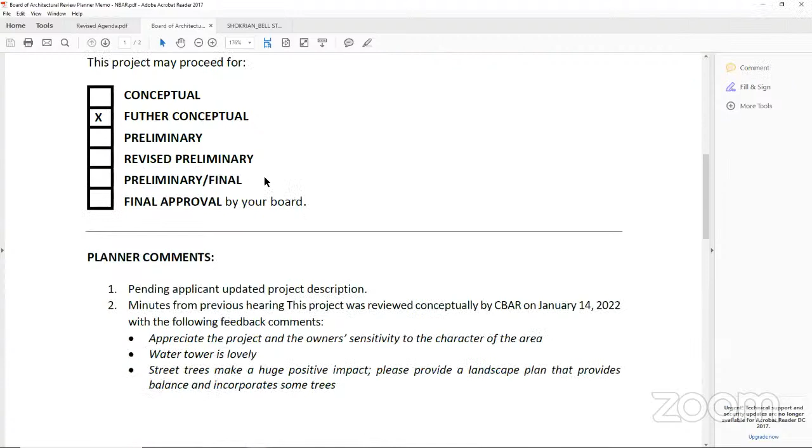First of all, the owner for this project is Babak Shokrian. He's owned this property for some time and has admired Los Alamos for a number of years. I was fortunate enough to be brought onto the project. I've done a number of projects in Los Alamos, more of a historic preservation approach, with the old gas station next to the Union Hotel, Bob's Well Bread, which was also an old gas station in town, and a third project years ago, which is the current location of the bodega. So I feel I've contributed quite a bit of historic preservation and a new twist on some old structures that are just completely charming there in Los Alamos.

So with that, this is the first ground-up construction project we've considered, and Babak was kind enough to bring me on board. The commercial project here on Bell Street, as you know, the owner could have kept this as one contiguous property or project, but somehow was led to believe he needed to split it. So Mr. Shokrian has both the Bell Street project here as well as the Waite Street project behind, which you'll hear after this presentation.

I've always been somewhat of a historic preservationist, and what better town to land in than Los Alamos. My wife and I moved up from San Diego back in 2003 and immediately started talking with a number of landowners there about potential projects. We opened up a home and garden shop at the Bodega, a really charming property with stone walls and so forth. So I understand the sensitivity to the town and really enjoyed contributing to it over the years. This is our latest project, and as you can see, it's in the conceptual phase.

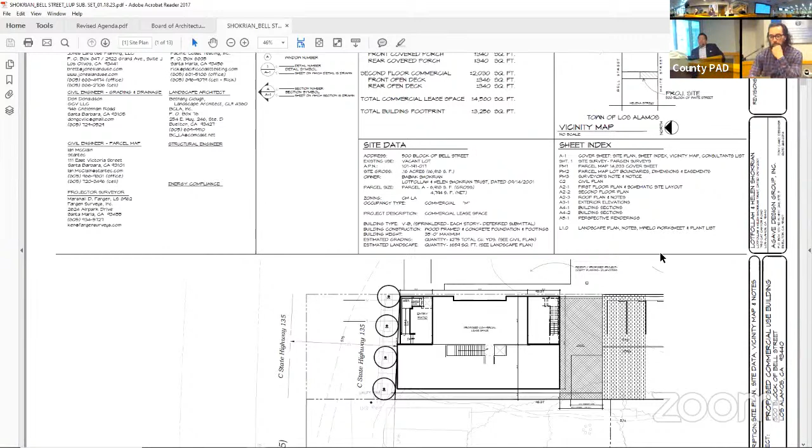Talking with our planner, Adam Orta, it made better sense to keep the ground floor commercial, and we'd like to propose 2 residential units upstairs, staying within the same building envelope that's been designed. So please keep in mind that it seemed to make sense to have a residential component on the second floor rather than repeating the commercial on the second floor.

With that being said, we've got roughly 2,500 square feet of lease space there, as well as the entryway, which must accommodate ADA accessibility. At this point, keep in mind, because it's conceptual, that we'd like to think of this as residential on the second floor.

Working with a number of local design professionals, Don Donaldson has done our civil engineering. Because it is a flood sensitive area and has a special overlay, we've considered that in this design as well as the Waite Street project. We'd like to extend the sidewalks along the highway state route, planting trees out front. We're working with Bethany Clough, a local landscape architect, on both projects, so we see the improvements continuing down as much as possible. I think the board just recently approved the Meyer project just to the east of us as well, a much bigger project that's going to turn out fabulous, with a real historic component as well.

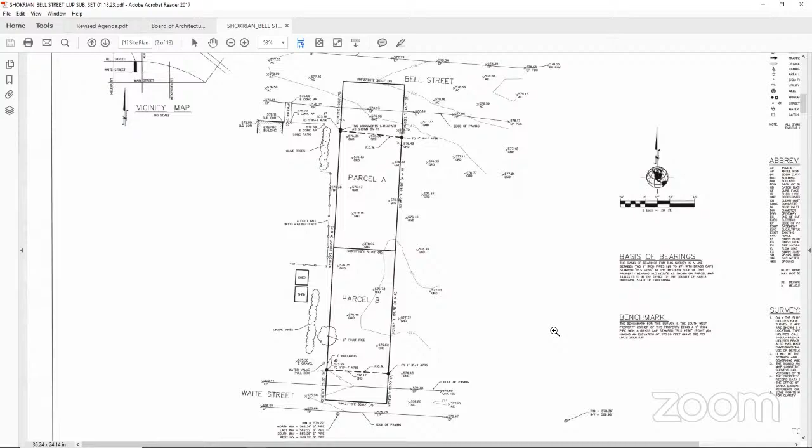Okay, moving on. So this is just subdivision documents showing that what was at one time 1 parcel from Bell Street to Waite Street is now 2 parcels.

So as you well know, there's a sensitive flood component. I don't know if there's been any issues with all the rain we've had this season, but nonetheless this is part of a FEMA map area where the particular lots have to be elevated if they're within that flood zone, making Los Alamos a special problems area. So we've accommodated that by essentially raising the entire building pad on the magnitude of 24 inches, with a ramp component and on-site drainage.

If you would please zoom in, you can see the hatching at the back of the proposed building. That's intended to be permeable pavers to allow groundwater to dissipate through the site. Any overflow would run in that channel to the far left of this drawing, to the west of the parcel.

We were also asked to provide a 3-foot wide Verizon for a communications easement there. So if anyone's wondering why we didn't go to the property line, we've been asked for an easement along that property line to the west. Okay, next please.

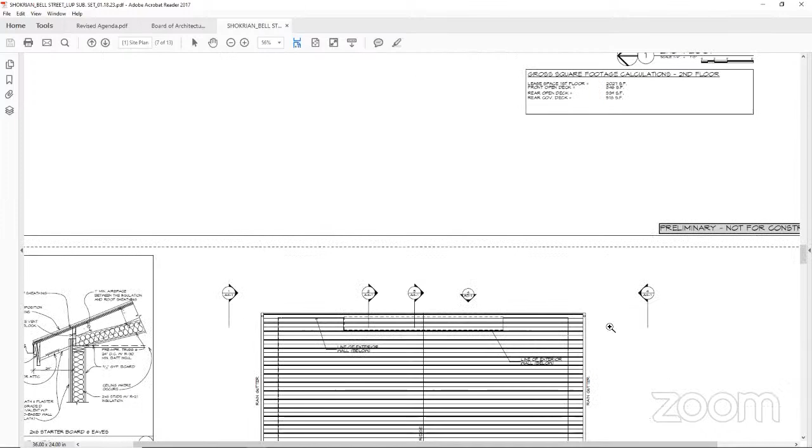You see that either old corrugated metal roofing or possibly standing seam, just to give it that old ambiance of an older building. So those details reflect what we anticipate some of the roof lines and so forth would be. Next slide, please.

Here's our proposed elevations. The front elevation would be the south elevation, which is actually along Bell Street.

So we see large windows, much like you would see in an 1800s building where there's minimal divided lights, that would be the grids and so forth. We'd like to have some roll-up doors just to make this more inviting during the seasonal times, so both of those lower level large units would be roll-up type doors.

Upstairs, now changing more towards a residential feel, that'd be nice for a nice upstairs balcony there. We see rustic wood siding, old station lanterns and so forth for the lighting elements.

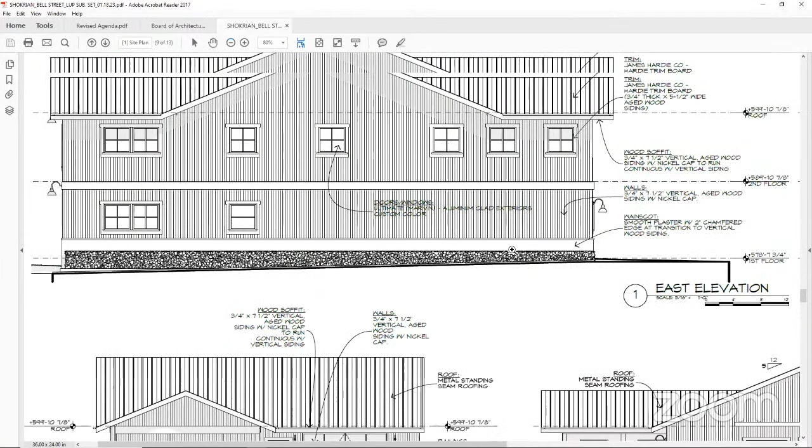And then we can slide to one of the other elevations just for an overview. So wood siding, the repeat of a old fenestration motif that would continue on. This particular elevation would be facing Bob's Well Bread, if you're all familiar with that.

Then sliding down to the next elevations, the one there on the left would be the rear elevation. With the idea of going to residential apartments upstairs or living units, I think it's going to be fabulous for views in each direction as well off of these proposed balconies.

This elevation here would be facing the recently approved Myers project. I think they've got a structure directly adjacent to this, which has more of an agrarian feel to it, maybe even an old barn, if you will.

So a lot of those old elements, I can see some anodized metal lanterns there, as you see, open grid railings, and just give it sort of a rustic feel as much as possible. We probably have a wainscot at the bottom there.

Whoever's controlling the cursor could run horizontally at the bottom of the building. I'd like to give it a feel as though that wainscot there would be sort of a concrete feel to it, just to make the building look rustic as much as possible once we move in, rustic wood siding and metal roofing. Okay, next.

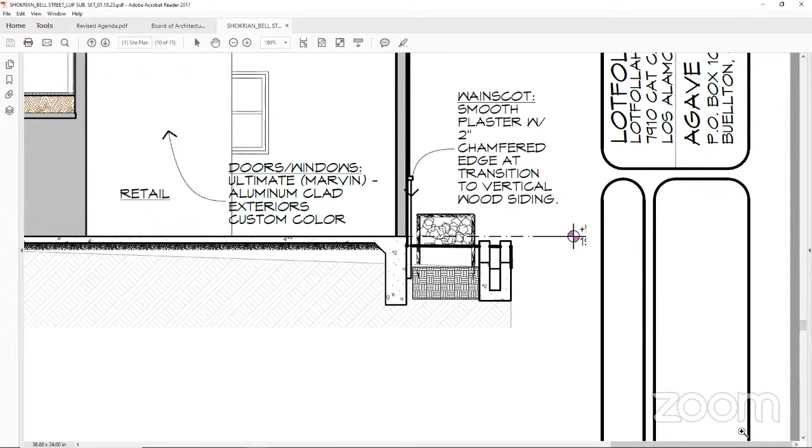Also, this is an easement that was required by Frontier or Verizon, so that they could have a communications easement there. We can expand to the other drawings.

This just gives you a general sense of the bulk or the scale of the building. Next slide.

Again, more of the same, just to give you a sense, and we do have a height restriction, which we'll be well under, I think we're 3 feet under the height restriction. Next drawing, just to give you a general sense.

I just was cautious about adding too much color. I think it's more about the form of the building and how it fits into the current surroundings. Next.

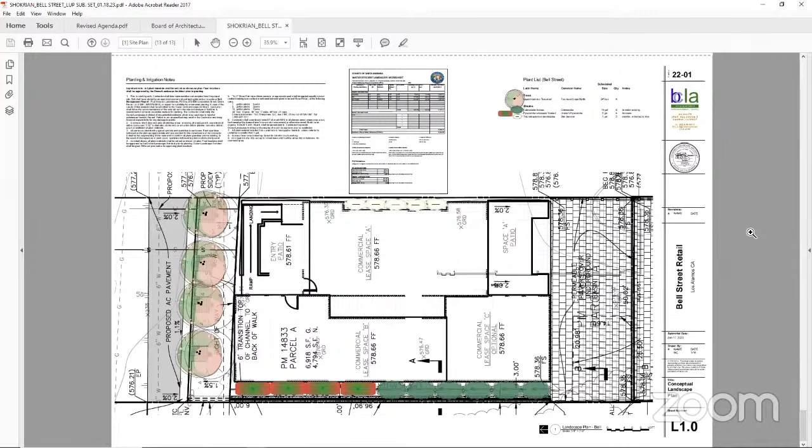This is our landscape plan. We'd love to be able to carry as much of the green foliage as much as possible, and I think it helps to create a building, a little extra separation from Bob's Well Bread, which would be to the west of this, or at the bottom of the screen. So it gives us an opportunity to create a bit of a landscape barrier and some greenery along there with annual color, and then, of course, we'd continue the street trees to the left there.

Okay, I think that may be it. I'm ready for any questions. I'd love to hear your thoughts.

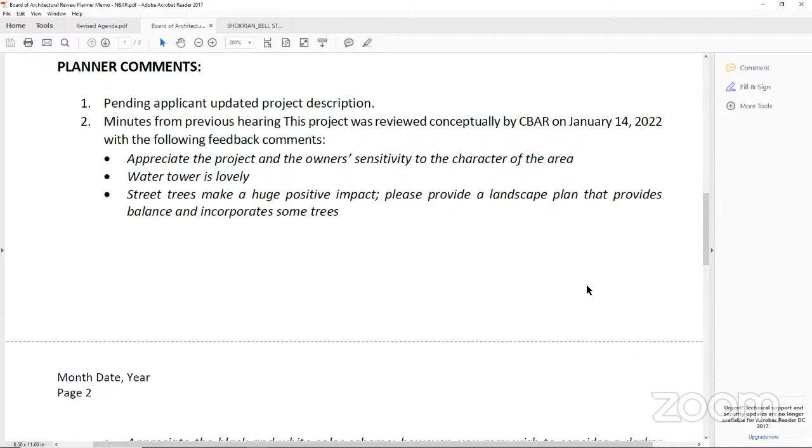There was also a water tower that's being proposed for the Meyer project directly adjacent, so we felt like, rather than creating that redundancy, it would be best to remove the water tower. So its water tower was lovely.

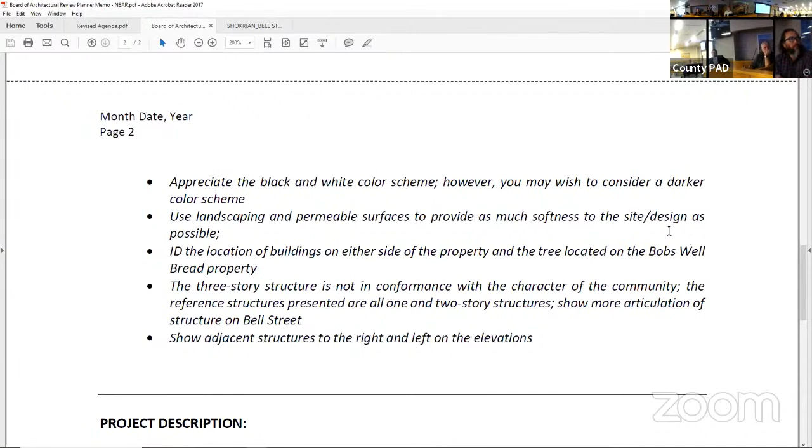Now, you say it says it's a black and white color scheme? Is that still true? That's not true. The unfortunate thing is both projects were reviewed at the same time at the other BAR, so I think there was some confusion.

A lot of those comments from one project to the other, Bell Street versus Wade Street, were combined. So the Wade Street has got a different character. What I'm proposing is more of a rustic vertical wood siding that would be reminiscent of a barn.

And what material would that be? Are you going to paint it or leave it natural? Well, there are actually lumber suppliers that provide materials that have a rustic nature to them. They're cured, so you're not going to have a lot of splintering. So the direction right now would be to use real wood weathered siding such that it doesn't split, crack, and become unsightly.

So I see on the plans it's 1x8 vertical. That's quite possible. There's cured material you can buy in 1x8, making it less expensive as long as you have the proper underlayment. So that would probably be our direction, to use weathered material.

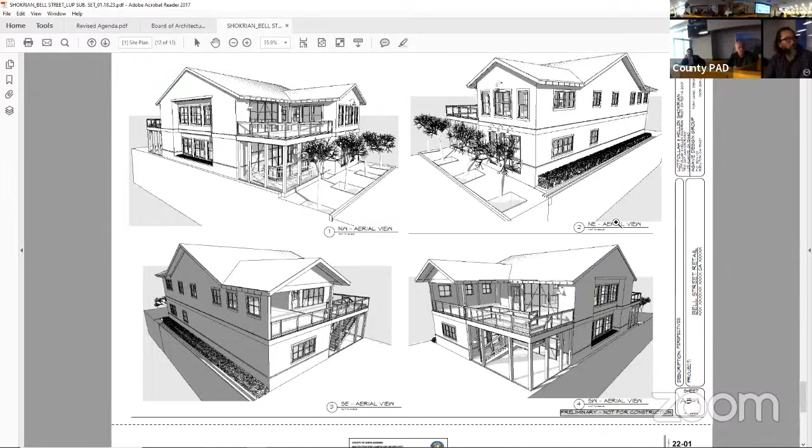Can you tell me what a nickel cap is? Were you seeing that on the elevations? It's mentioned several times. I just didn't know what it was. Yeah, I'm not sure either. I don't recall. On the south elevation, which I think is actually the north elevation, number 2, see where it says 1x8 siding with nickel cap. I honestly don't know what that is. It must be a misnomer that I missed.

Just so I know which way it is, that's the north elevation, right? Oh, I'm sorry, that should say nickel gap. So the vertical siding would have a nickel gap, which is just a way of gauging the space in between each individual board.

Thanks, and how do you waterproof that? You can get it pre-finished, and we'd be waterproofing it from behind, because with the use of real wood siding, we'd have to adhere a piece of fireproof gypboard behind it, as required by the fire department for high fire zones. Does that answer your question?

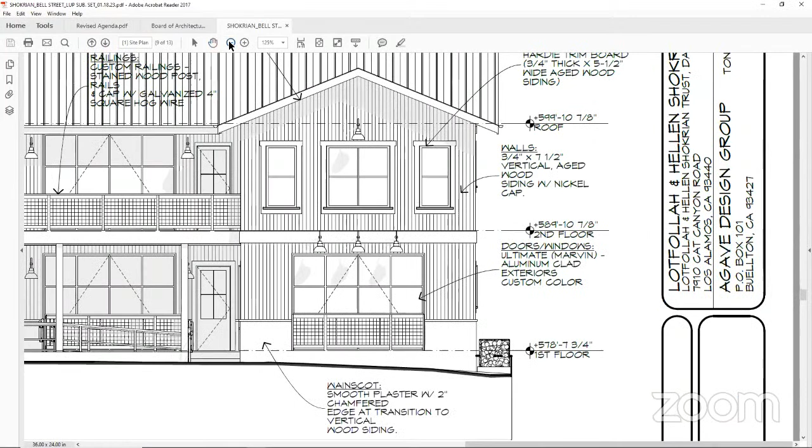And the gable up above is kind of empty. Is that where you intend to put a sign? Yeah, so there would certainly be signage right there in the gable, introducing this in some way. Just haven't made full circle with signage quite yet. Okay, probably it being devoid of any kind of articulation of any sort, it could be a good place to put the sign. I agree. I absolutely agree with that.

Okay, the gable around the side on the right side, it's pretty - there's no ventilation or any kind of articulation of any sort. Are you planning on looking at that? If we could go to that elevation, please. Yeah, that'd be great. That's that upper left.

Yeah, that guy. Yeah, I think some additional articulation there could be great. Even a repeat of that window that's currently centered on the gable at the second level - maybe we replicate that, bring a copy of that same window there further up into the gable. That would be nice. And you've also got the eaves almost in the same plane. Are you going to bring one of the gables forward or backward to get the fascias? Sometimes there's a problem where they butt together like that. Yeah, think about that anyway.

Yeah, and this is the one that faces the bakery, right? It is, correct - Bob's Well Bread. Yeah, that was also a project that I designed. So my thing is with Los Alamos, it's so charming that we try to pick up as much of the historic detail as possible. And when you get into a single line drawing like this, it looks so clean and crisp, but I think it's important to create some rustic nature to some of these elements.

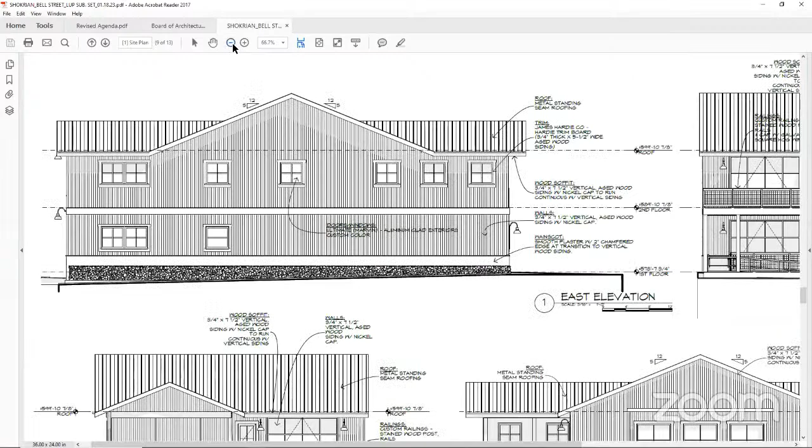The other thing is, I've not seen anywhere on here what the overall height of the building is. So let's go to one of the sections. I believe I noted it there. There were elevations above sea level, but I don't want to do the math. There are some previous sections too. Forgive me, I don't recall whether I actually put that on there.

And what's the maximum height? 35 feet is the maximum. Is it 35 or 25? 35 is my understanding, from existing grade. So keep in mind, we're having to build these lots up with a retention about 24 inches above existing grade, so that kind of impacts the overall height as well.

Yeah, I saw two different heights when I was skimming through the guidelines. I don't remember which one would apply. It's my understanding that 35 - I believe Adam is present too, he may be able to interject, our planner. Hey there. I believe it's - let me double check right now. I believe you guys are correct. Which is what? Sorry, 35. Give me one second.

Any other questions we can answer while he's helping with that? What do you think the peak height is on your building to your ridge? I'm sorry, what is the height of your building? I could have sworn it was on here. I thought we were at 31 feet.

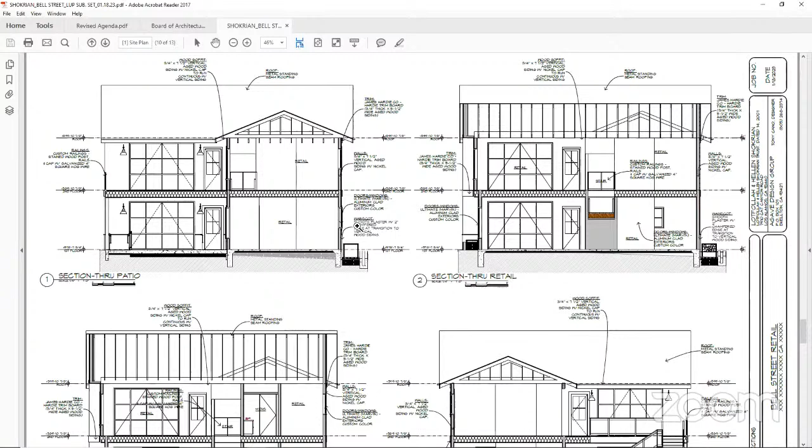Are they 10-foot floors? At one time we were at... yeah, I don't think the height would be there. It would be on those elevations. So you're about 22 to the top plate, the second floor top plate? I'm sorry, I just can't answer directly.

I thought we were more like 30 feet to the highest ridge there. In fact, the elevation you were questioning, the east elevation. Yeah, you just go to the highest point. Yes, that elevation, correct. Make sure you show that next time.

I'm not sure who's asking me questions. Hey there, sorry, this is Adam. Yes, it's correct, the maximum height would be 35 feet. Thank you. From existing grade, correct? Right.

Any other questions I can help with? This is Steve Reese, I have a couple questions. Jim covered several of them, but I'm a little bit unclear at this point what the distance of the building is from the property lines on the sides.

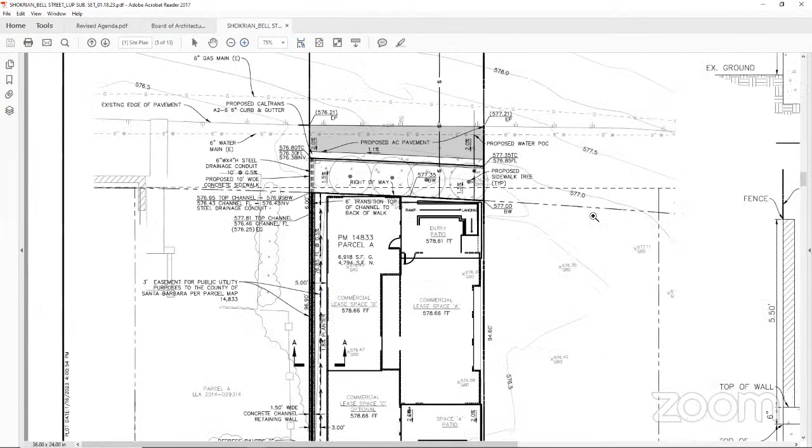I think it's 1 foot and 5 feet. I've got it, yeah, you can zoom in a bit more too. On the east side of the building, it was 1 foot. We'd wanted to maintain that in the event we needed to get any drainage out that direction, but the engineers determined that we've got to have the retention on the back of the property. So at this point, we've got a 5 foot side setback on the west side there. You can zoom in, see where 96.9, yeah, right there.

So we plan to have a drainage swale for overflow. Okay, well, I get that. Where I was going with this is the 1 foot side. I think you need to check your building code a little more closely here, because I don't think you're allowed to have many fenestrations within 1 foot of the property line.

Well, you're right, and that's why I have that indentation there. I brought the building face inside, and so we can have false windows as long as they're treated per the fire code.

So there, and as you convert this over to residential on the second floor, your fenestration is going to definitely be changing. Yeah, and that's... I think that's going to be an important aspect of how this thing looks going forward when you start to put bedrooms and living rooms and what have you on that second floor.

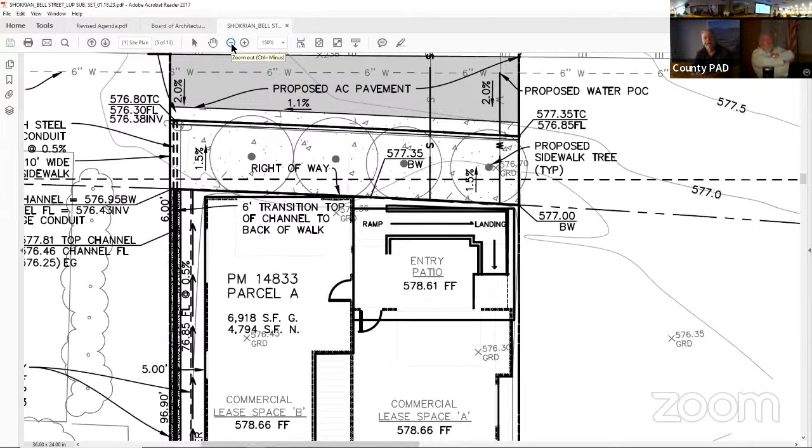Yeah, so you'll see that on this design as well as once we get to the Waite Street project, where fenestration facing towards the property line can be pulled back or recessed further to meet the code. Well, three foot, I believe, is the minimum, and then you're dealing with a percentage of the wall. Yes, we'll be working with the building department, and part of that submittal will reflect what code requires. I understand, but if we're reviewing this and you're showing windows, then the windows that may or may not be there in the future, it's not a realistic presentation of what potentially could be the facade of the building.

Okay, and my second point, or second question, is—Jim touched on this—in those high gables, perhaps you want to look at some attic ventilation, maybe that could be placed up in there. I don't see where you've really dealt with ventilation yet, but again, that distance to the property line could be an issue for your attic ventilation.

And the third point would be the mechanical equipment, where you're planning to place that if it's residential on the second floor, and how would you plan to get mechanical equipment down to the first floor? Or maybe you've already thought that out. I just don't see it on here. Yeah, being that it's a conceptual view, we haven't quite gotten there, but I think there are some great options for us. With the movement towards heat pump equipment and things like that, it's going to be a challenge. So we'll end up hiring a mechanical engineer that'll guide us through the process.

Okay, well those are pretty much my points, along with the ones Jim touched on about the height of the siding on that gable end. That looks like it's somewhere in the neighborhood of 20 feet, and I don't think you're gonna find lumber that long, so you'll probably have to split that with some flashing and trim. But as Jim said, I'd like to see that also on your next submittal.

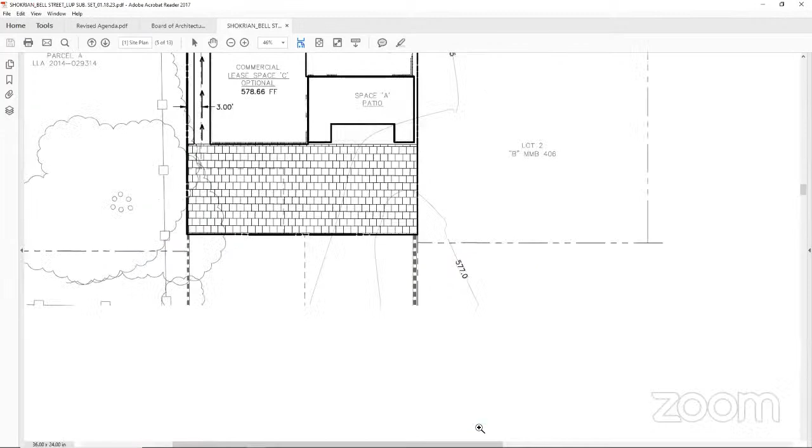So there's parking for the residential side on Wade Street. If we zoom in on that hatching towards the bottom of the sheet, I believe there's a repetitive note. This is our on-site retention, which will allow site water to be directed here, permeate through the soil, and then overflow will run out through that overflow channel to the left that we looked at earlier. So are they 40 feet apart?

Minimum, yeah. So once we get to the Wade Street site, you'll see there's some parking in addition to this underground basin on the Wade Street side. So it's a greater distance, I'm going to say probably on the magnitude of about 30 feet. What I'd like to see next time is a site plan showing both of them and an elevation showing both of them, not necessarily for working drawings, but for continuity, at least on the side elevations.

Well, you do understand that they're two separate submittals, correct? I'm going to review them though as they're... yes, I do. Okay, so this will, so you can use them for both, it's a 2-for-1.

The other thing, Tony, would be, because I understand the aesthetics here to look very rural in character and older in styling, but you might want to consider where you're going to put your solar panels on that roof. It's now a mandatory feature for residential, as you probably know. Oh yeah, yeah, that's going to be kind of an important consideration on that roof plane, so you might give that some thought. Does the board have jurisdiction over where I locate solar or PV panels, even though it's required by a state mandate? Yes, if we can see it, it's visual. Okay, alright, fair enough.

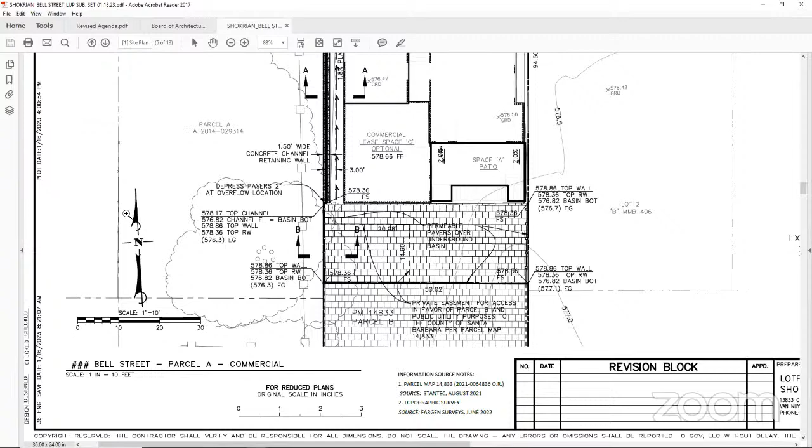Yeah, you can see it looks like bullet holes, that's a multi-trunk. Yeah, right there. So you can see where there's a number of circles there that represents a multi-trunk for that old oak tree that's there, and it does spill over onto this project site. So you see where the section BB is with 2 up arrows.

That's the scroll line that represents the drip line of the tree. So my question is, is the tree going to be affected? No. Even though it looks like it creeps over to the other property? It definitely creeps over, but we're going to be diligent to preserve that tree. It's fabulous, we want to build to it, not eliminate it. It's gorgeous.

My other question is probably to staff, Adam. Now that Tony, you had mentioned you're looking at shifting the emphasis of the second floor in the front building to residential, does that change the parking requirements, the on-site parking requirements, which I think were somewhat limited before? I do know you have a delivery parking area between the 2 buildings. I believe I heard that at the CBAR meeting recently. But I'm just questioning now that that has changed, is there going to be an increase in the parking requirement?

Thank you, Michael, was that a question for Adam or for myself? I think it's probably for both. So, I see Adam's, are you coming on, Adam? No, go for it, Tony.

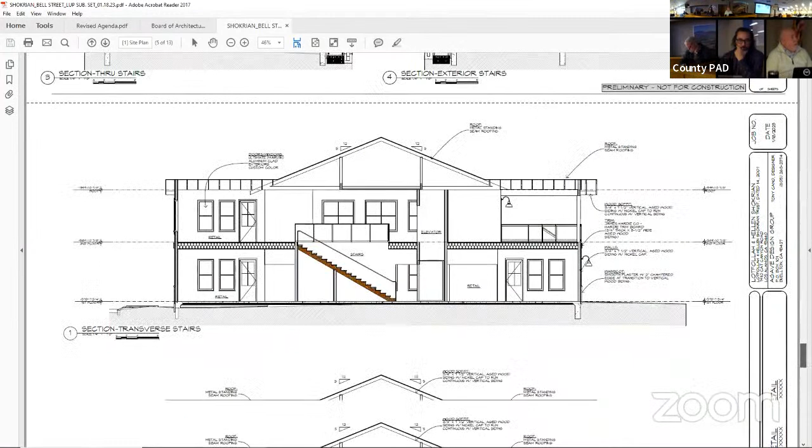If I may, Mr. Chair, I reviewed the landscape plans and had only one small concern. Tony, what kind of fencing are you proposing on the west side? I don't see any yet? I don't see that we'd be proposing any fencing. If you go back to that page we were on, that's what I thought I was looking at. Yeah, let's take a look and see.

Oh yeah, I hadn't addressed this with civil engineer Don Donaldson, so that was something I'm sure he found an appropriate drawing for. We may have talked about it briefly, but I think it'd be better if we didn't have a fence there, quite frankly.

Okay, then that makes my concern a little more important. I'm not sure exactly what is on the west side of that property line, but the plant that Bethany's proposed has thorns on it. So being especially close to the sidewalk, I'd be concerned about that. Just recommend that it be pulled back away from it. That plant has long pendulous branches that could extend out, and unless somebody's constantly maintaining it, it could be an issue there.

And I know that Bethany's present for this presentation, so your comments are welcomed for sure. Okay, and then I had a question for staff.

Kevin, can I ask you a quick question about what the name of that plant was? Pyracantha. Fire thorns, if that's easier for you. All right, thank you.

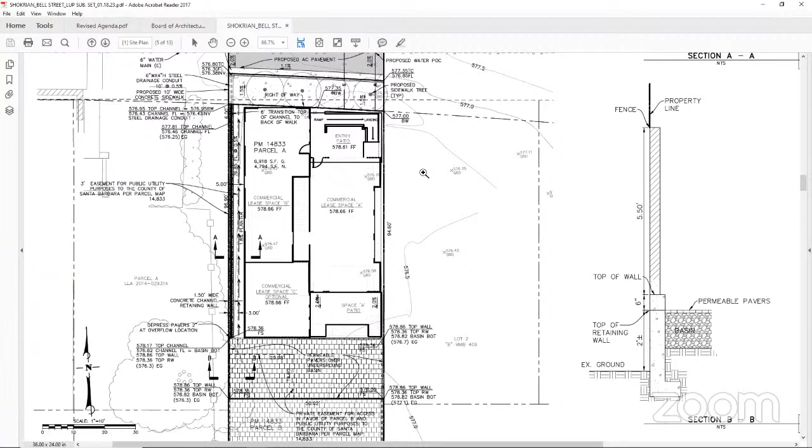Do any of the board members have any other comments at this time? Mr. Chairman, I do. Tony, this is Tom Lopez.

Hey there, Tom. Yeah, I was wondering about your section B, shown on both the residential and commercial side, on that same page—if you zoom in, the one we were just looking at where Kevin was talking about the fence right there. So that fence is about 8 foot high on the adjacent property. One of the comments from CBAR asked to show adjacent structures.

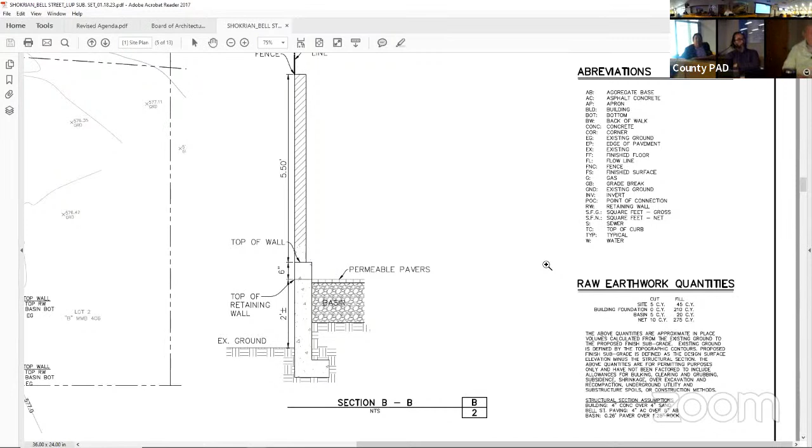My question is, how long does that section run? Because I know it's also on the residential side. Yeah, and that's why I presented this as potentially not having that fence there. Maybe it's time to sit down with Bob Oswaks, who has Bob's Well Bread together, and just talk over this.

Obviously that's an excessive height there that we wouldn't be putting it up that high. There'd be a much lower fence. We want it to be neighborly and feel more open and not restricted. I think with the proper planting there in that planting space beyond these pavers, if you go back to the site plan, there's a significant planting area there. So Kevin's point is well taken. We'd select a plant material there between the two sites.

So we've delineated some of Bob's Well Bread next door. You can see the building outline and some of the other improvements, I think, have changed since we last did this. But yeah, we're going to be neighborly and want to make sure that feels open, comfortable, and doesn't feel too boxy when it comes down to it.

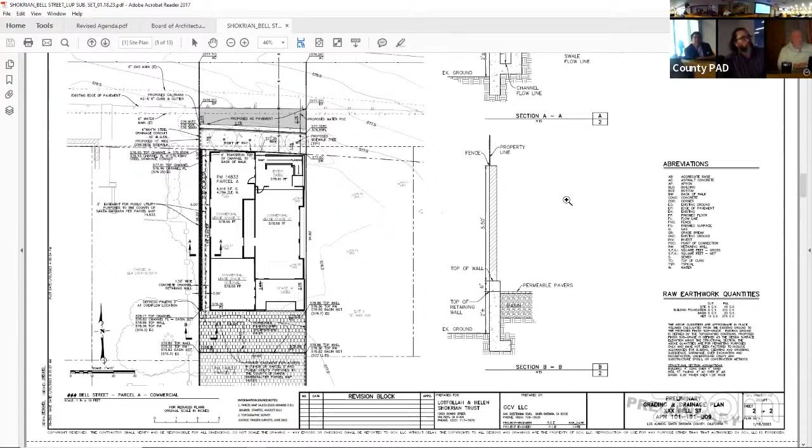Is that same section on the east property line? It's fairly simple, or fairly similar, yes. I know at one time in the last presentation I saw for the Myers property there to the east, there was a significant building, quite a large building in that area there.

I think we're both trying to respect one another in the space that's provided between the two buildings or the proposed buildings. So NBAR has not seen the presentation of our property next door? No.

A quick question for staff. If indeed you have to bring this up 2 feet for flood control, wouldn't the Myers project to the east also have to? And thereby wouldn't really need the retaining wall. Right. Yeah, I'm not 100% familiar with the delineation of that flood zone, but I would imagine that the Myers project is subject to the same requirement.

If the elevations are a clue, on the 5-foot setback side, it looks like you've covered that retaining wall with stone. And on the opposite side, it's kind of flush with the ground. So maybe that's what you're doing? Well, unfortunately, I think it's a bad choice of graphics. It's actually a planting area. You can see if you zoom in on the drawing to the upper left-hand corner.

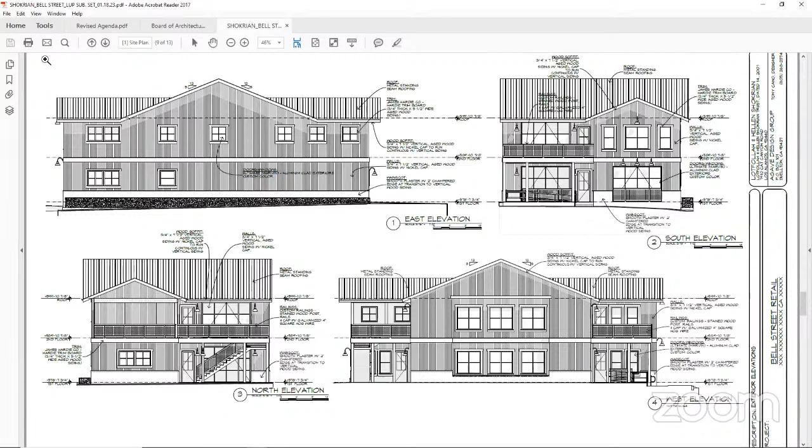Thank you. You can see the bold line below represents the drainage from that drainage basin. And so that's unfortunately a bad representation of planting or a hedgerow there. Just bad graphics. That's not the retaining wall that we're seeing that looks like? No, it would be below grade, to allow that water to flow from the rear of the lot to Bell Street, so it's going to be bare concrete?

Which, now, the retaining wall that we just looked at previously? I doubt it. We'll need to dress it up somewhat, give it more of a rustic look. There are ways to treat concrete with a washing effect after it's been set, maybe larger aggregate to give it an aged look. So that is what I would prefer to do.

Okay, figure out what you want to do, because there's stucco above it. However you want to deal with it. Yeah, just bad choice of graphics. I apologize. Well, the reality is that retaining wall may not even be there. Yeah, the comparison is similar. Yeah, it'll be a planting area.

Do any of the members have any additional comments? I do. One more comment, and I know that this is a somewhat complicated stretch of buildings that are all sort of happening at the same time in Los Alamos. I think it would be really helpful if for the next hearing we might see how these three buildings relate to each other, a streetscape, would be helpful. Thank you.

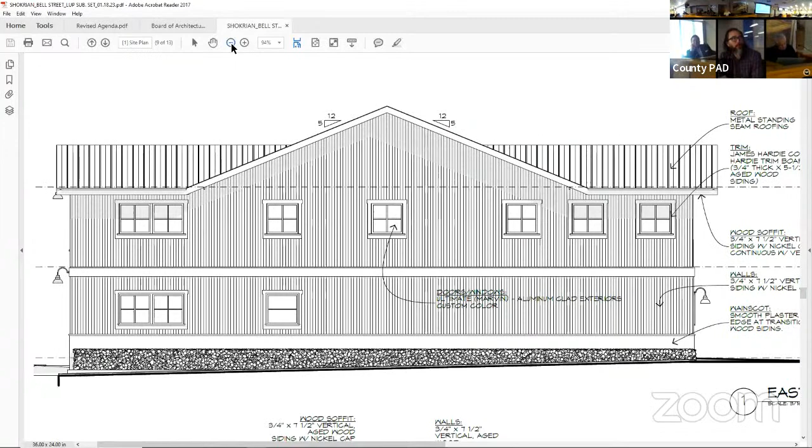Thank you, Michael. So just a couple quick things. If you can provide in bold outline what is the existing building to the west on the site plan, so that we can identify what may or may not be conflicts.

I'm sorry, did you say to the west? You're referring to Bob's Well Bread in this case? Yeah, Bob's Well Bread, if we can just bold out where the building is in relationship to your building. And I believe you've got preliminary plans for the Myers project. I do. Okay, if we can kind of give some context as to the relationship between that 1 foot setback and where the phony windows are.

So I do have a question relative to that. What is county planning helping to do with projects that were previously reviewed by CBAR but now become NBAR projects? Is there a follow through? Is there a system that informs your board as to what's been approved in Los Alamos under CBAR?

Man, I wish I had the answer for you because I wonder the same things. We will ask Tina to send you the most updated site plan for the Myers project, because it has changed a little bit since she communicated with you previously. I don't know that we have any materials. What sort of project is it?

It's commercial in the front on Bell Street, with one residential unit above, and three cabanas that are short-term rentals in the rear, also considered commercial uses. It's a through lot from Bell Street. It's a comprehensive project, and their proposed structure is much larger than ours, so there's definitely a scaling issue to consider.

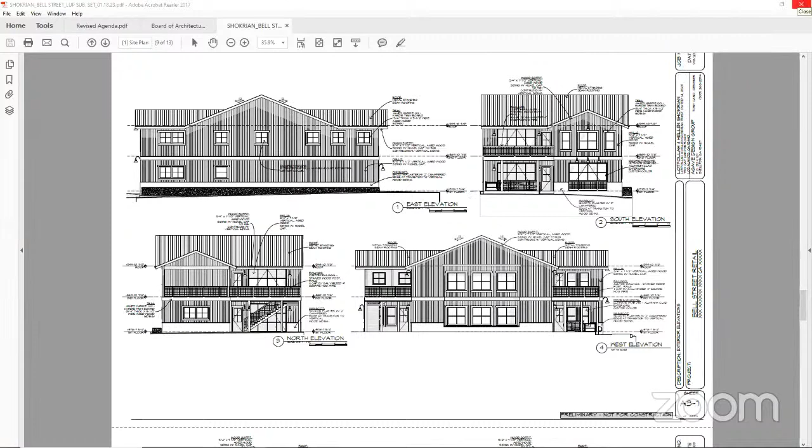That sounds great. Yeah, thank you. Appreciate the comments. Thank you.

Moving on now to the second item on today's agenda. It's the residential component for this extended lot, DAR number 21-00262. Tony, anytime. Yeah, hello there.

Okay, so as a back-to-back feature there and the sensitivity with potential for flood throughout Los Alamos, we also have a basin to the rear of this lot as well. So those two drainage basins, if you will, be back to back and they're permeable.

It looks like I've delineated what was previously proposed for the project next door, which I had as 21 LUP 00588. And those were footprints, I believe, for proposed structures. Yes, that's right, as well as that. So there was a commercial/residential component towards the Bell Street side and smaller residential units to the rear towards Waite Street.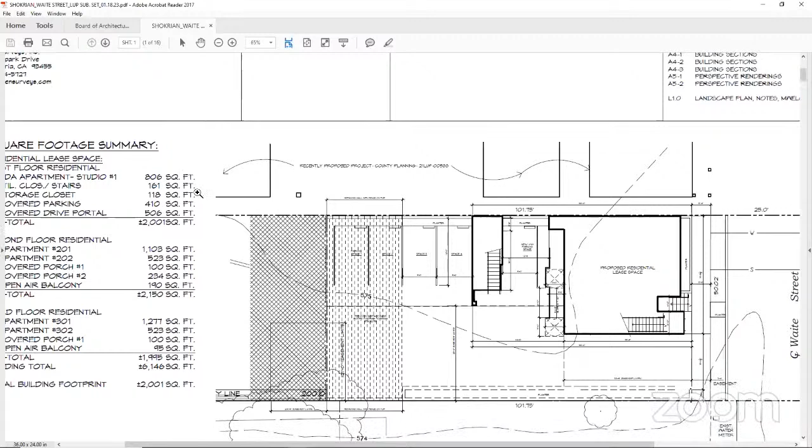So Tony, the ones to the right, how tall or how bulky are those? Do you recall? The next door? Well, when I saw the project last, they were two one-story structures. There might have been a slight loft in the larger structure there to the right, but they were, I'll just say, low rise, with a steep pitch roof, I think 5 and 12, 6 and 12.

So this project here, we have a total of 5 units. It is 3 stories in height, which the CMLA allows. So I've tried to keep the roof pitch and so forth low, but we anticipated that this lower unit here may be an ADA or an accessible unit. So there's a slight ramp up from Waite Street to the required building pad height of approximately 2 feet.

It'll match the Bell Street side. So with that, the individual is able to enter through those areas on the backside with a need for a handicap ramp if needed versus the front street side. So we can go to the next sheet.

On that one, where's the second floor at? We'll see that in the next page, but it's basically a stacked structure over that first floor. Does that answer your question?

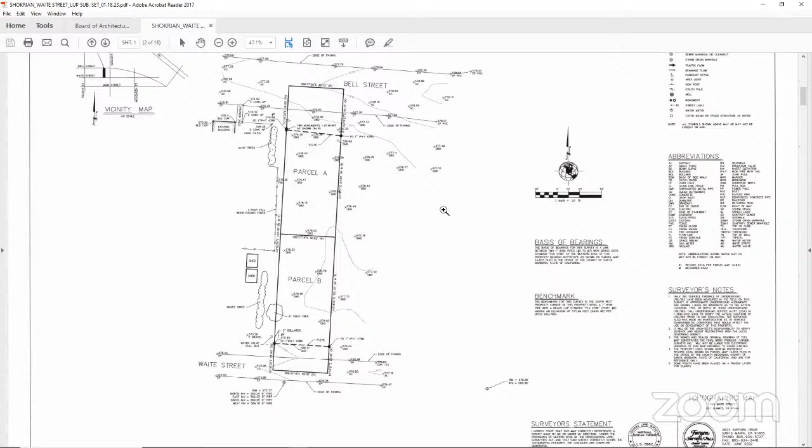Yes. Okay. Here's our engineering, just the front and back, which we subdivided these 2 parcels some time ago. Rather lengthy process, as you might imagine.

Here's a legal document just showing the 2 parcels. I wanted to show the relationship. My understanding is that lots 1, 2, 3, and 4 adjacent to the east along Augusta, yeah, that's a sort of master plan, if you will, as one comprehensive project.

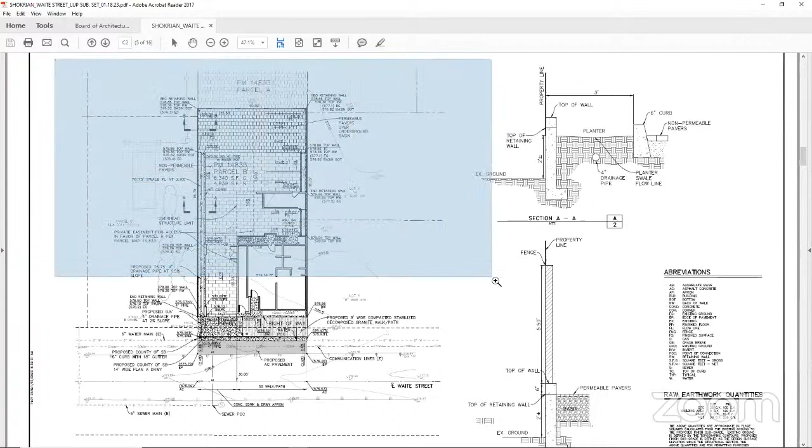This is our engineering for the Waite Street side, very similar to what we were doing on the Bell Street side, where we have permeable pavers over an underground basin there at the top of the sheet, or to the north. So it's quite similar. There are some trees, smaller trees, that are adjacent to our property. I think the back half is also part of the Bob's Well-Bred project.

So zooming in, we've got a number of parking spots on the back. Because we have a total of 5 units, we have 5 parking spots. We want to introduce some planting both on the east and the west side. So there, where you see an SD, which is a drainage system, you have a planter there to the left, or to the west property line.

Okay, moving on to the next slide. This is our proposed lower level, considering our drainage considerations, our basin to the rear, or in this case to the north, and then our street improvements.

We're working with Bethany Clough as the landscape architect for the project. Thought it'd be great to introduce some foliage there along the Waite Street side. It's going to be quite foreign, Waite Street hasn't had these types of improvements in this area, so we want to couple it with the Augusta project next door, the Myers project. So we kind of borrowed on their idea and concept for the sidewalk here.

Along the westerly property line, we've got the same sort of thing where we need a drainage channel to help drain for overflow, which will take drainage from that back hatched area for the drainage basin out to Waite Street. So it gets pretty complicated in terms of elevating one to meet the flood requirements as well as drainage for overflow. It helps to set up a nice planter between this project and the project to the west.

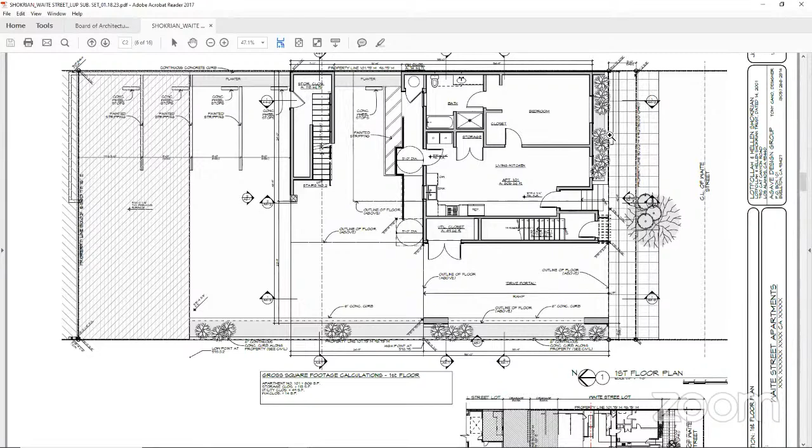That white section there in the middle was at one point a gabled roof, so we flattened it to reduce some of the mass and volume through the center of the building. Same sort of details - we plan on high fire, so a lot of these materials will be made by either the Hardie company or someone else who makes a cementitious fire retardant board.

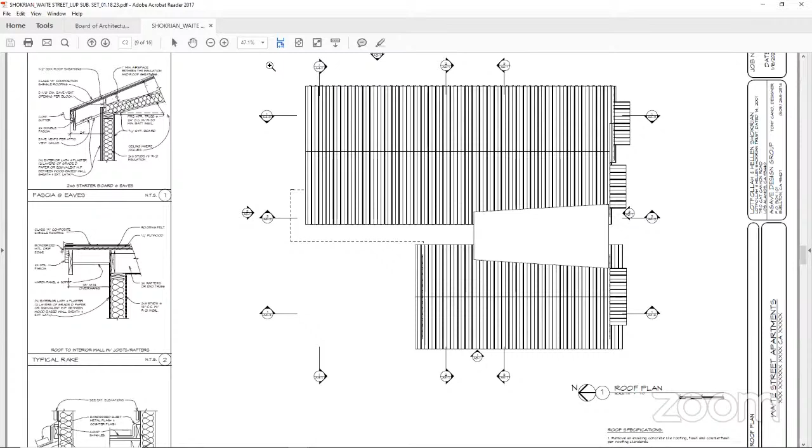It's pretty typical - we would have a drive-through portal. Checking with the fire department, we did an early review with them, and they're okay with the 3 feet to the west side for pulling hoses and things of that sort.

The balconies, with the tremendous views that we have throughout Los Alamos in really pretty much any direction, we plan to utilize these walkways with the low railing with a sort of rustic wire, which meets the code. So you'll see those strong horizontals are that wire railing and guardrails. Divided light windows just give it more of an older feel or look to it.

These are some of our sections. We did what we can to get this thing under the 35-foot limit, so therefore the ceilings aren't what we had hoped. We're at about 8.5 feet at the first floor, and 8 foot for each of the other 2 floors.

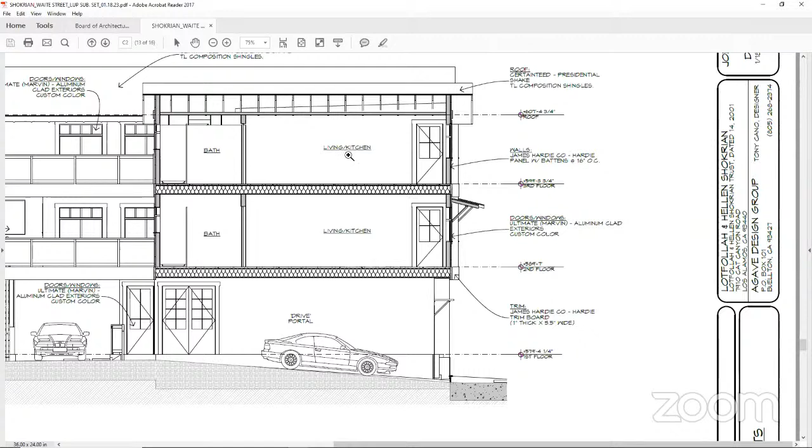Yeah, they're to the right, just to the right of the elevation. I just wanted to point out the awnings for shade and for window protection facing due south. Thank you.

This gives you a sense of the building, the portal necessary to get through to the drive-through, and how we plan to break up the elevations with awnings and planting out front there. We do have an incorporated planter to take that front unit off the street about 4 or 5 feet, giving us a slight recess. And on the back side there, because of those views, we'd have a delineated railing and balconies that can pick up the sunsets to the west.

It's more of the same, trying to give the committee an opportunity to look at how we've broken up the elevations, especially on the rear side there, and our drive portal to get to the rear parking.

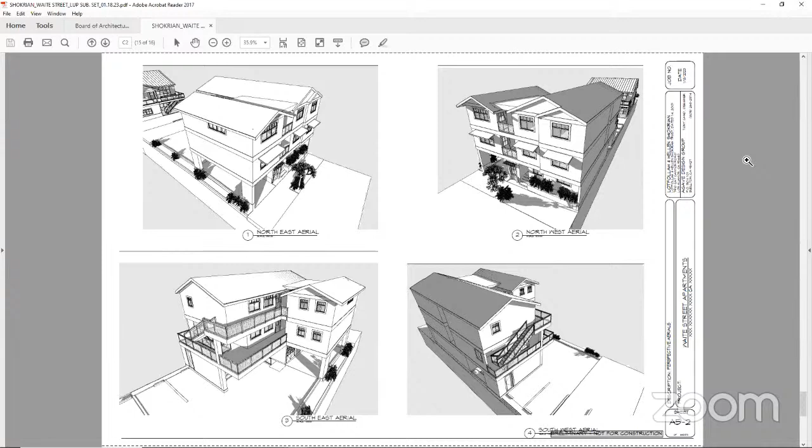Because our spaces will be open—at least in the last Myers plan that I saw—there was a considerable amount of open space to the left where the shrubs are a yellow color. So that space is fairly open between the two buildings, or the two properties. I think that concludes most of my comments. I'm ready for any questions you may have.

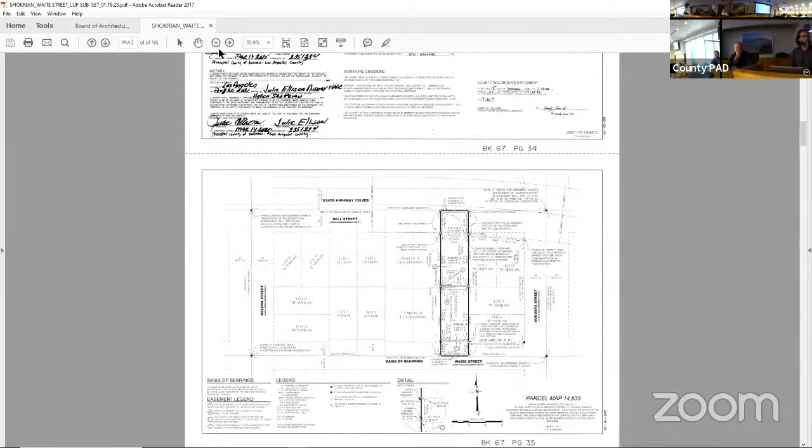This is Jim. On the site plan, there's 4 parking spaces. I don't know what page that's on—it was on the landscape plan as well. A21. Yeah, there's a total of 4 that are towards the rear of the property.

Yeah, that's a great illustration. On that one, can you diagram next time how maneuverability works in there? Sure, yeah, absolutely—because my mother would get stuck. She wouldn't give you... well, we have a spot reserved for her out at the street. Don't believe it. No.

At any rate, I think that's going to be very difficult to maneuver. So you show me how it works. Sure, okay. I think it's doable, Jim. I've seen much worse in Santa Monica. People are still in those spots in Santa Monica.

Then if we go to the elevations—I have a lot of concern with the height of the project, the 3-story element on Waite across the street from 1-story houses. It doesn't seem to be too compatible with anything in the area. Is there any way to step back the 2nd, 3rd floor to give a little bit better handshake to the neighborhood?

Well, handshake is great—I've done a lot of work there and I'm sensitive to it. There are projects, especially on Augusta I believe, with a 3-story element maybe right at the same height. There's sensitivity with trying to provide the housing element within Los Alamos while sticking within the design guidelines and the CMLA. I think we've done that, so I don't know what other concessions could be made, but I'm all ears.

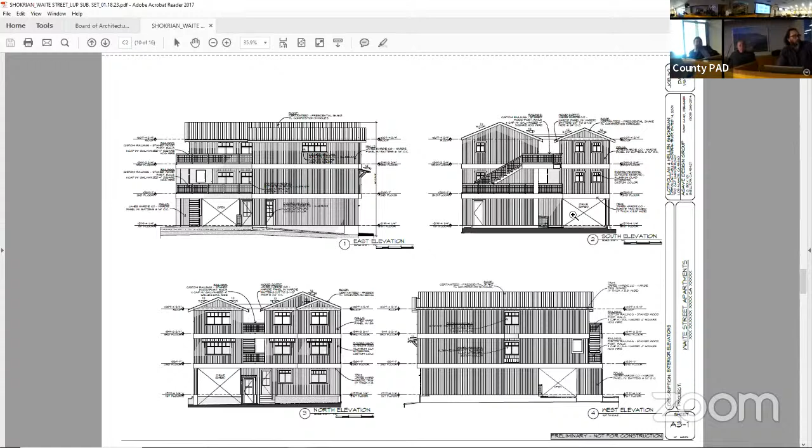So I appreciate the comments. On the other page, you've got a building height, but it comes from the slab—so show your building height calculations from the grade, the existing grade. Where is it? On the east elevation, there's a dimension line right there. We have the same comment in our letter. What is that, 36 feet? I can't see. Yeah, I think it depends on where we took the ground elevation there, Jim.

So isn't 35 the max? It is. Okay, make sure that works. I still think—I'm not saying it's easy to design something that fits in a community, but it doesn't.

Well, is that your opinion, or maybe express yourself a little further? Because if it falls within the CMLA, it's just going to be a matter of saying, hey, development's happening, we're doing our best to build a project within those parameters. We're only here for our opinion. Mine is that the second, third floor needs to be pushed back or lowered or eliminated in order to try to make it compatible with the neighborhood.

Okay. This is Steve—I think I share those opinions that the massing here is kind of monumental, without any breaking up of those straight walls, particularly along the lower right-hand one that's against that property line. I think that's going to be visible from a long ways off as just a big massive wall.

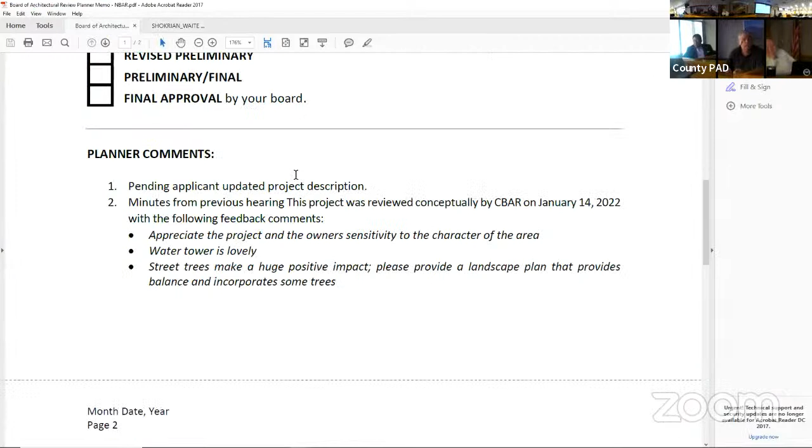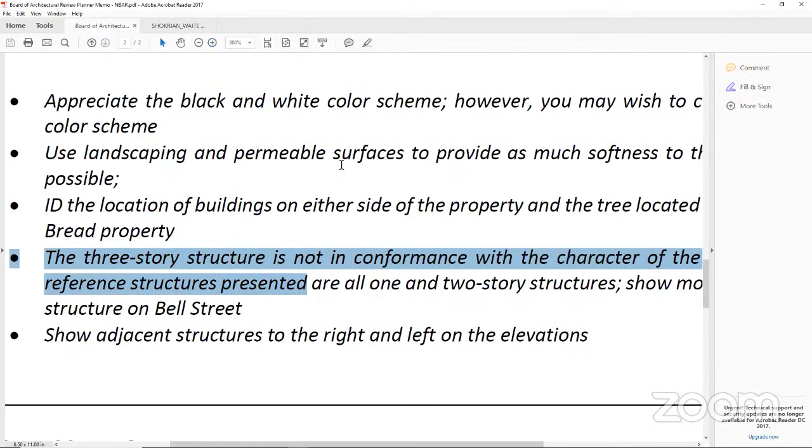So I think the county has to work out some of the— I thought that was one of their comments. Is it not a three-story structure? Well, these comments combine both the Bell Street and the Waite Street side. The CBAR comment says the three-story structure is not in conformance with the character of the community, but it is allowed by the CMLA. I think there's a conflict there with the county that should be taken up with planning, so I'll address that with our planner.

Okay. I just want to add, the 35-foot height limit applies in most areas of the county, right? And we also have design guidelines in certain areas of the county through the community plan. But ultimately, the findings of the BAR are subjective in nature, so there's discretion in how to interpret neighborhood compatibility, regardless of what the objective requirements are for a zone.

Yeah, Tony, I don't think we're saying you can't build a three-story. We're just saying, consider neighborhood compatibility with it. Now, with the project that's going to be built on the east, what are those buildings? Single-story buildings?

Yeah, there's a mix—the larger mixed-use structure, which to me appears like a rustic barn. It's pretty large in nature, in size and scope and massing. So that, coupled with this building—although they're not directly adjacent to one another—the massing is probably fairly similar. In fact, that building is larger.

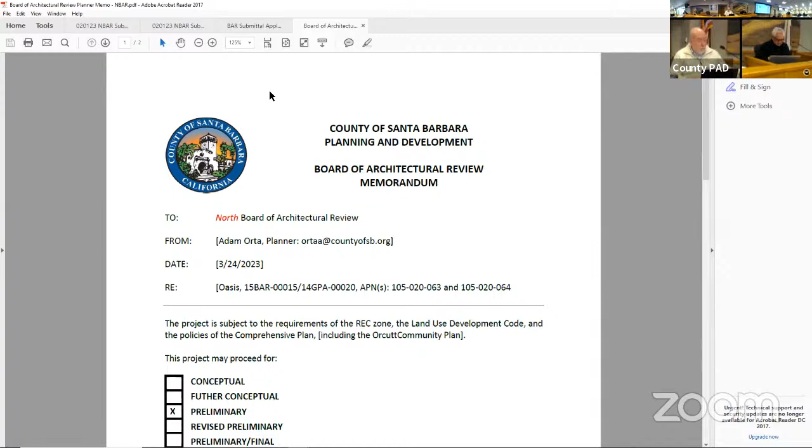We're here today for the preliminary review of the Oasis Center. This project is located in Old Town Orcutt. It did go through Planning Commission review for a couple of years. We had an environmental impact report, community engagement, and the Planning Commission reviewed it, and also the Board of Supervisors approved the project. So I'd like to just orient you, and then Tom Martinez, the architect, will get into the details of the design.

We also have with us today Michelle Southwick, who is the executive director of the Oasis Center, and Don Flegg, who is on the construction committee and is also a contractor, and Steve Lebard, who is an adjacent landowner who's recently sold his property but is still involved in the project, right? I'm just here. Oh, okay.

And so we're very excited to be here. This is a big project for Orcutt. Shannon was very helpful in getting us through that process. We're working through, I believe we counted about 100 conditions on the project. So this is an important step because it means the project can move into more of the construction plans and also deal with some of the other conditions that were part of the original project. So we appreciate staff putting this on the agenda and giving us direction to move forward. With that, I'm available for any questions on the planning side, and I'll bring Tom Martinez up for review of the actual design of the project. All right, thank you. Thank you.

And Mr. Chair, I just wanted to point out again, I have it on the screen that there was a planner memo for this project. Is the planner present? Hi, Chair. I'm Adam. I'm here. Yeah, Adam's the planner on the project. Okay, Adam, is there anything you wanted to speak to before we go to Mr. Martinez? Yeah, sure. Just to reiterate, kind of piggyback what Lori was saying.

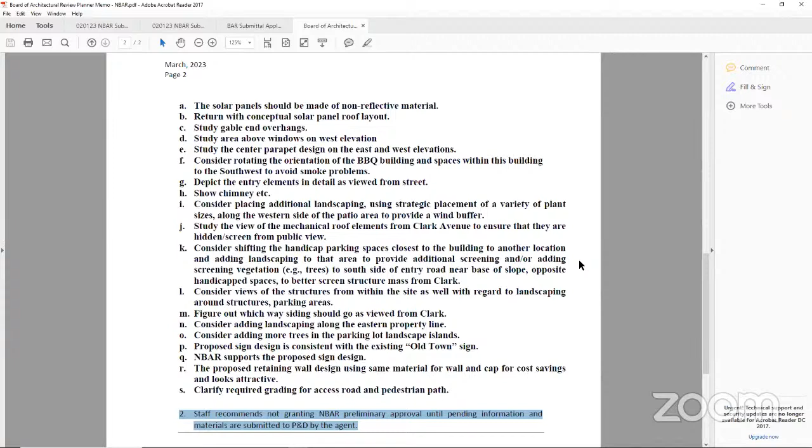Mr. Chair, I do have a quick question. Yes. Three of us were not present back in 2017 on the board, so Tom, if you would just give us a little bit of background, get us tied up at this point a little bit, because at least I'm not aware of it.

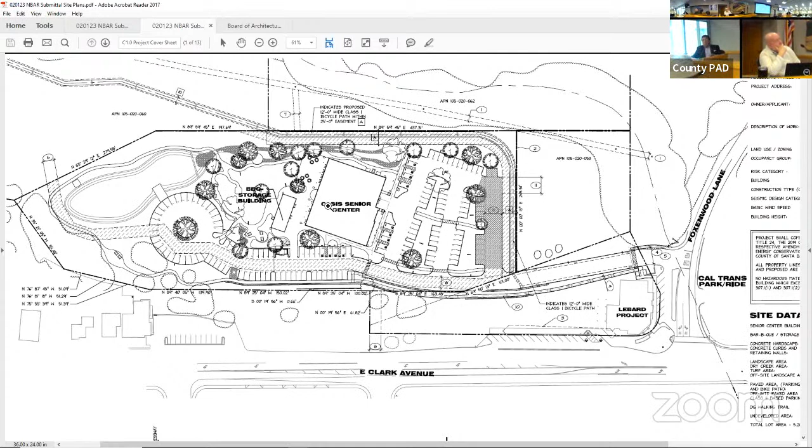The basic building has not changed at all. We've got a primary building of approximately 14,000 square feet, which is the main facility for the Oasis organization. They're going to have some offices with it. If we go to the next slide, well, let's stay on this. There's the primary building that is most of the events, and there is a large community hall.

Second building, which is more for storage. There are some pottery classes, some kilns within that, and a barbecue area.

What's the slope down the driveway? From Foxenwood Lane it's about 5 to 7%, dropping from here all the way down. There's a transition of probably 8 to 10 feet. This walkway meets accessibility requirements, which is one of the reasons we had to move the wall, since we're basically up against the hill.

Are the parking lots asphalt? Yes, except for this area here, which is a class 2 gravel base. Into the driveway going off to the hinterland on the left, this is just native grasses, that's just an easement there. We come in paving to here; this is class 2 all-weather base to keep everything soft, so that's not asphalt either. No, asphalt stops right at this point. All of the parking from this point back is asphalt, class 2 base — we just didn't get the texture on it.

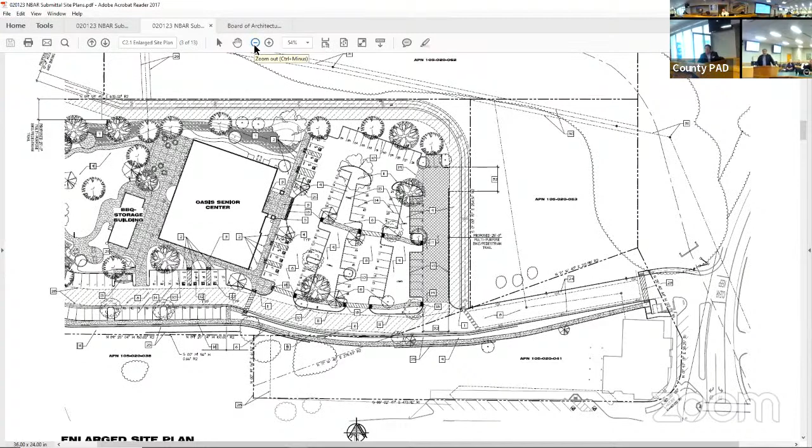Next slide. Are you going to have significant grading on this site? There's 4,000 yards of cut and fill, so we try to balance it as much as possible to control the drainage. Again, the back end where the barbecue area is, there's a hiking trail, a little exercise trail for members to come around. Circular parking, as we mentioned, and here's our retention basin.

That's my question about buses — if you're dropping people off at a barbecue area, do you need a bus radius turn there? I don't know what the scale of that is. Well, this satisfies the fire department. Okay, so it's 80 feet. And it's smaller to the bus or car — it's a smaller bus than the fire truck would be, like a van. So it's 80 foot probably to the cars.

But the barbecue area is more for the events. It's not like we're going to have the public coming to barbecue. They're coming to events happening within, and they're providing the barbecue services from this point. We also have a kitchen within the facility for smaller events, etc. You have outside barbecues that people could use though, right? That's the outside barbecue, I mean like little barbecues.

So as you can imagine, this project had a lot of community engagement. The concern raised from the South Point neighborhood was how the events would overwhelm the site.

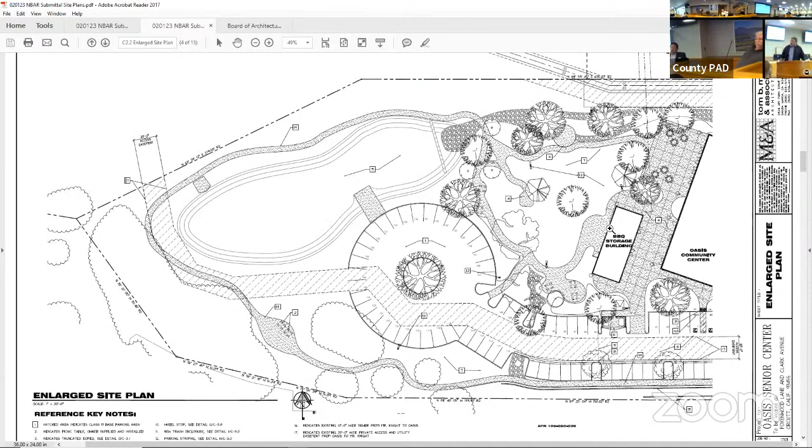Again, when they initially did that, they thought it would be very convenient, but when we started looking at it, I had to discuss this carefully with the building code. Unfortunately, it sounded great as an alternate site, but any access you provide for the able-bodied, you must also provide accessibility. That created some switchbacks that were just horrendous. On a slope like that, it all had to be concrete to get a good foundation, and it was just getting horrendously expensive.

So we basically just took that off the table.

There is access, or there will eventually be access, we believe, because there is the trail that comes back and hooks back to California. There could eventually be some access, I'm not sure, at the end of some of these streets from Old Orchard that could come down off that backside, because this whole area starts sloping down and gets relatively accessible from this side, whereas from this point, or even from South Point, we're about 30, 35 feet below those levels.

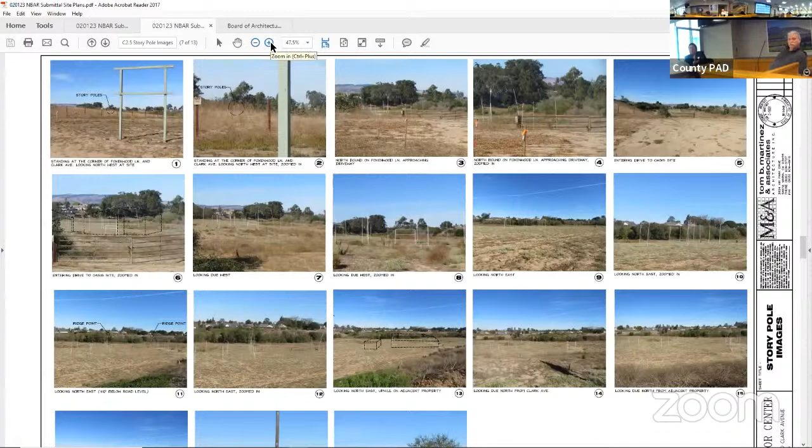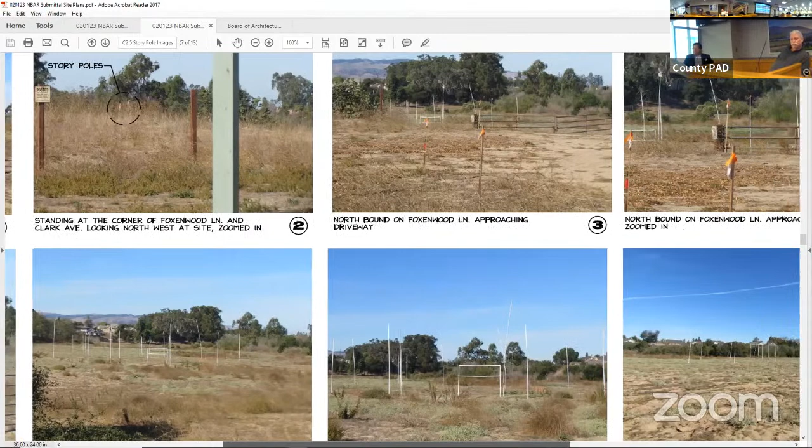These are the story poles that we put up through part of the initial processing through the planning commission, because the neighbors were concerned about the height, the visual, etc. So we put the story poles up, and it became evident after putting those up that the neighbors to the north-south point really were not ever going to be able to see even the tops of the building, which is about 28 feet, unless they were actually standing at their fence line, peeking over that 6-foot high fence, because we are significantly below that.

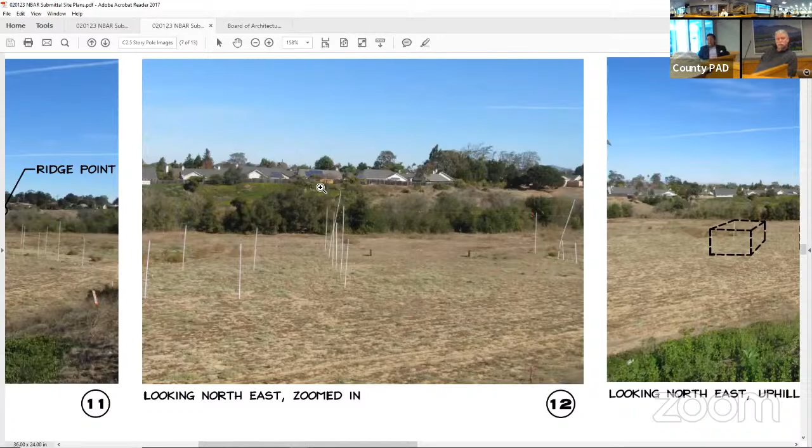This picture here is taken from across the street, on the park side, up above on the hill. We're looking down on it, but you can see the tops of the story poles, and you can see the residences. So you can see that 6-foot fence is actually a few feet above the highest point of that building. So if anybody's sitting in their backyard, they're really not going to have the visual unless they walk right up against that fence line.

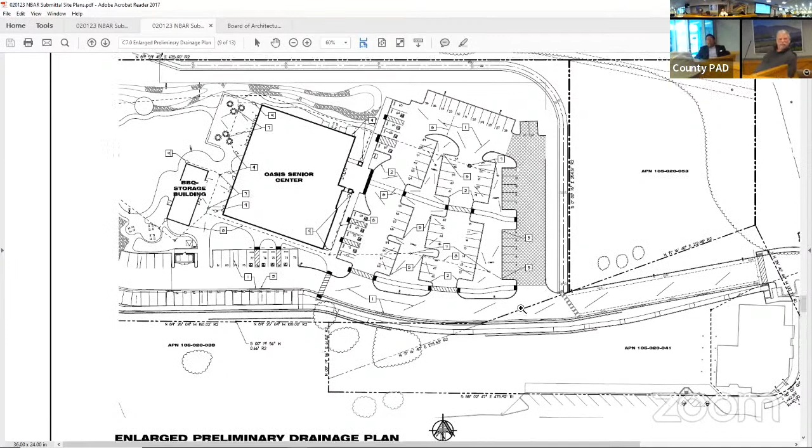Preliminary drainage plan, again it's just an enlargement. Actually, that's not even the drainage plan, it references the drainage plan there. It's just showing flow lines, the collection points to get the water to the basin.

Again, you can see the routing of the containment drainage basin, drop inlet, picking up the drainage and bringing it over here to the basin, up and around the building.

Site planting - I believe Kevin had seen this and commented that they wanted to add some more trees along the edge to soften the building a little bit. We are kind of limited with space, so we couldn't put too much here in front, because it's going to overtake, and the trees are not going to have an area where they can grow well in these small little areas between the walkway, which is required for accessibility, and the front of the building.

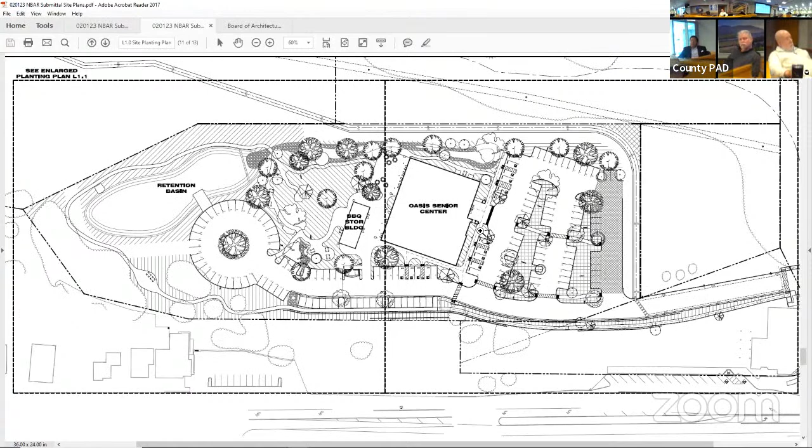Again, just an enlarged site planting plan, showing the trees and all of the various planters, trees around the back to soften it. And be mindful that there are no trees whatsoever in this entire basin, except for a few around the perimeter, I think, somewhere.

You said there were oaks? Pardon me? You said there were oaks next to the street? There are oaks. Is that what you said earlier? Well, there are oaks on the creek side, yes, on the east side where the channel - I'm not sure what the name of the creek is - comes in, crosses under the expressway and then goes around to the northeast and across the north border. All of those are primarily oaks. It's Solomon Creek. Solomon Creek, okay. It's off the headwaters, off the peak up there and towards Los Alamos. Thank you.

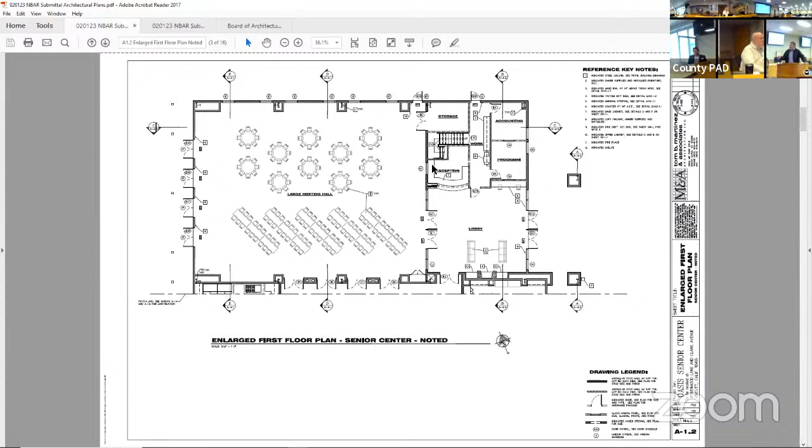Next slide. Just an enlargement of that same first floor of it, with lobby, reception area, program director, accounting, storage for miscellaneous chairs, etc. for the event center, and for the large meeting room.

Next slide. This is just the dimension plan for that.

This is a keynoted plan identifying desk, furnishings, etc. for the different activities. Those are not any of the fixed elements, they're just the anticipated layout.

Next slide. Dimension floor plan of that building. Next slide.

Excuse me. Sorry, I should turn that off. No. Sorry, my phone's tied to my hearing aids. I'm old.

This is just a roof plan for that second building. There is an attic area over the top of the larger building. And actually, I'm sorry, my apologies.

This is the second floor for that center, and this is the little office for the executive director.

So that's over the entry lobby, right? That is correct, that's the entry lobby right here. That's the only two-story element and you're tucking it into the roof. Yes, it's under the roof, basically that roof line of the big meeting room, correct.

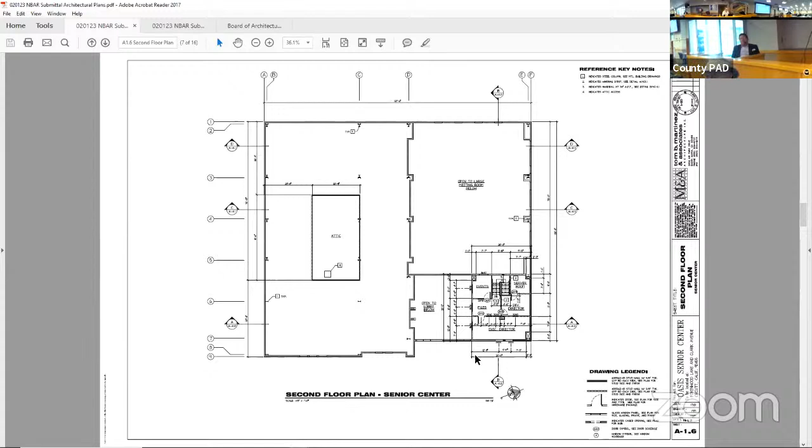Next slide. This is the floor plan of the barbecue area. This is the barbecue area.

There is the... I can't read that, I'm sorry. Can you enlarge this area? Because there is a storage component.

These are the two kilns, and this is just the outdoor art area. This is actually a roll-up overhead door, just to give them some outdoors feeling. And then a pair of doors that would be glass, just to open up the area. Unisex restrooms for anybody participating out here for the barbecue crew.

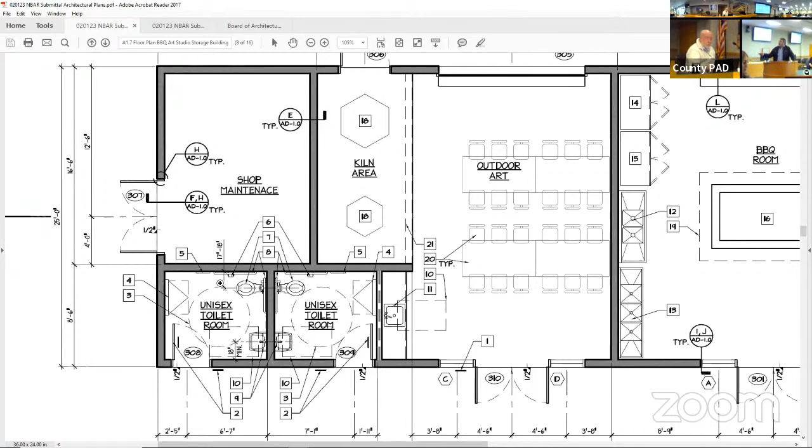Again, if we could slide this over. A commercial Santa Maria style barbecue, and again, with the hood that will be used over the top to control exhaust and odors coming off of that. Three compartment sinks, etc., because they will be having events, it really needs to meet commercial kitchen standards.

So, next slide. This is just to depict the well area.

So we didn't have a bunch of mechanical equipment sitting up on top of the roof, we basically created a well between, and everything is designed around a prefabricated metal building system because we wanted to get the volume, but we wanted to keep it as low as possible. By using the metal beams, we make smaller elements and kind of hold everything down so we're not getting it up high where it affects any of the views from either side coming around.

So this is just the framing for that well for all of our mechanical equipment. Next slide.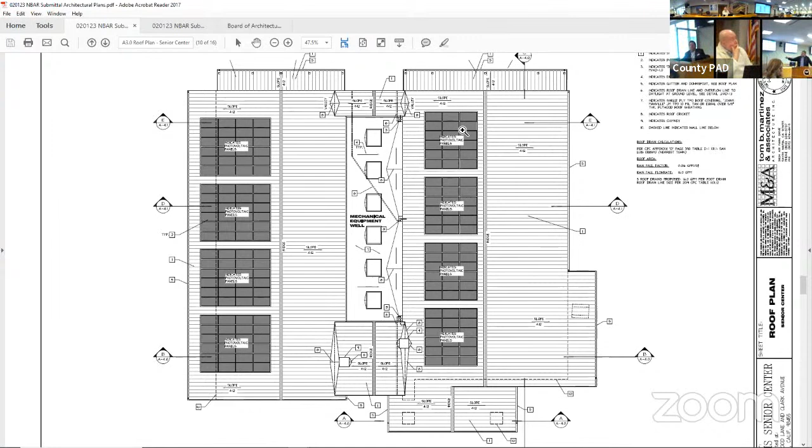Again, a roof plan showing the wells, mechanical equipment that we can service from both sides off of this. This is just a roof element to create some architectural detailing on the front and back of the building. And then these will be the solar panels facing south on the building roof.

Next slide. Again, just a roof plan of the barbecue building. There'll be a mechanical well as well, so very similar in the layout where we've got conceptually two smaller building elements.

And then solar panels. That's open in the middle, right? Yes, that is correct. Next slide.

Okay, exterior elevation of the building, the primary building. This is actually the entry, and again, primarily glass at that front entry. This is the administrator's office. So we've got glass because there's lower offices and then upper offices.

Breakup of the elements just to not have the feel of one big square box, which is typically what happens with a metal building. So we've added a roof, a gable element here, and changed the direction. The wall panels are prefabricated metal with a batten finish, a copper-looking color, and it gives a batten finish, so it actually looks like wood.

We have longevity and weather protection with the prefabricated metal skin. We used that in both elements, breaking it up horizontally with the same element but a lighter color, right in the middle, just to create some variation and a feeling of breaking up those masses.

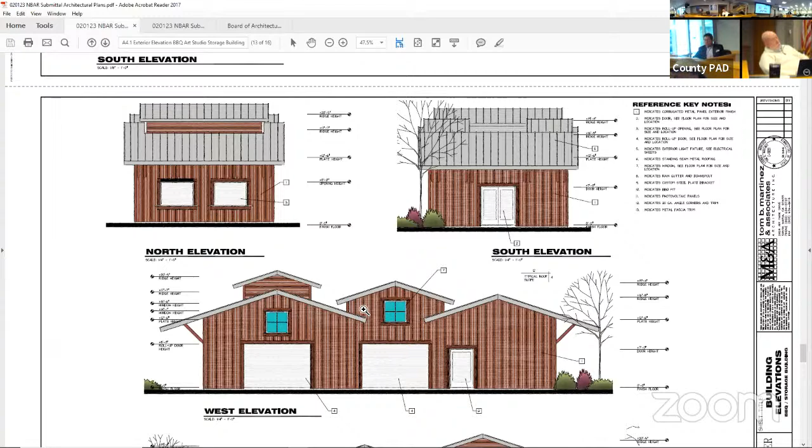Next slide. Just a different perspective, but here's where we're transitioning from two metal buildings to that flat roof element in between, where we'll be able to put mechanical equipment, which is screened from each end by a false roof element on either side.

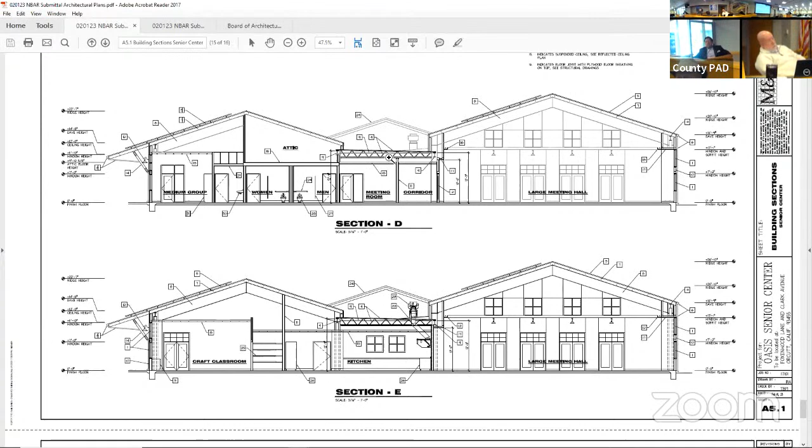Is that it? Okay, so the landscaping plan was active. The packet I have has the landscaping plan at the tail end, with an L1 and L2, so that's in the middle.

That concludes our presentation. We're available for questions or comments. We appreciate your comments.

Where to start? Tom, I have just a couple quick questions. Are the metal panels on the exterior insulated panels like a Kingspan type panel, or are they more like a Varco Pruden type?

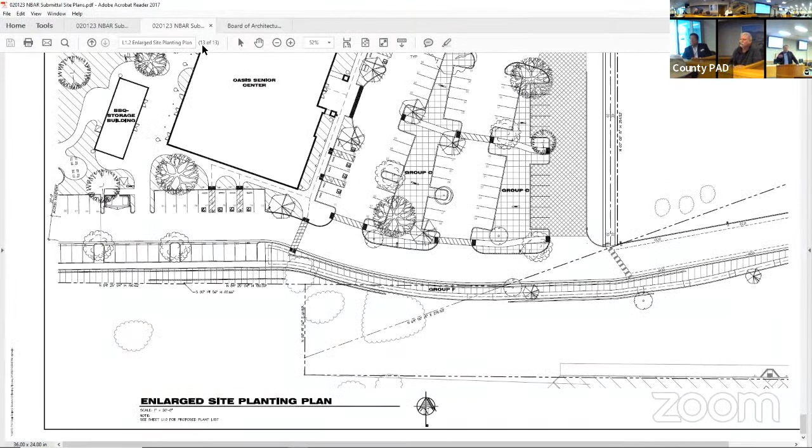Because we have to finish the inside of the building, we probably just use steel studs and insulate those walls so we can run electrical, etc., on the inside face. And then you're bracing it with portal frames? Yes. We've used insulated panels like in cold rooms, etc., but while they're very efficient, they're also very expensive - they are indeed.

Tom, I noticed in your sections the second floor had a window, the bottom floor had a window, but on your exterior elevations the windows go either to spandrel glass in the middle or... That's false. The middle is going to be false because that's basically at the floor line. With the tinting of the windows, you basically won't see that they're false windows.

I've also looked at your exterior entry on the main building. I'd like to see more sections in both directions to see what you're doing with the ceiling and how you're dealing with that vertical element with the sign on it, and delineate that whole front better. There's one section that just shows through the exterior plane through the column, but do one that's pushed back a little bit and in the other direction as well, because there's stuff going on - you want that front to look really slick.

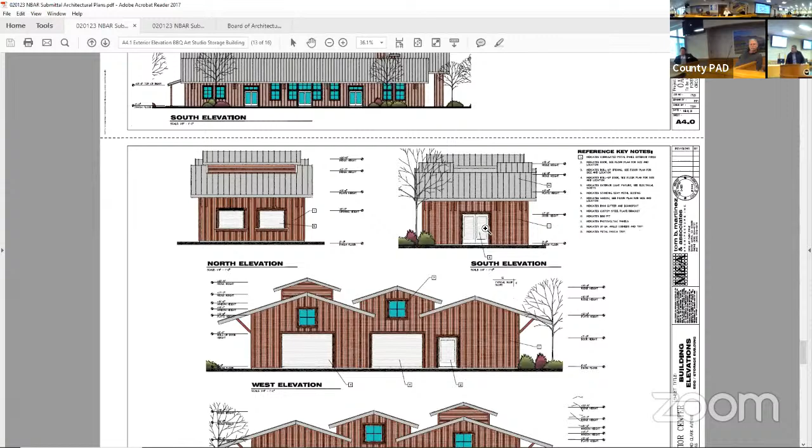On the little building, the barbecue building, I think if you look at the east elevation, if you take the left bathroom and flip the stuff in it the other way to push the door over to make it symmetrical - I know you've got a plumbing wall, but two plumbing walls, so what? If you flip it around, the door will move over about 1.5 feet and it'll be symmetrical about that gable, which would look better. Okay, yeah, that's something that can easily be done, sure.

And the little element on the right side - you said you were going to deal with the smoke. Is that element on the roof a smoke vent? It's a hood within the attic area I was looking at. How does the smoke get out? I don't see the holes anywhere.

Yeah, we will have to have some sort of exhaust, a captive air type hood. Commercial hood. We hadn't really gone into that much detail because we're just getting into the CDs at this point. But that shape is like a barn shape, there's a lot of things you can do with it. So I'd study that real hard to see if it needs to be a smidgen taller for ventilation, or maybe bring it to the front to have a different shape. Right now it's kind of in between where it should be, but I don't remember where I saw the section.

It didn't look like there was any ventilation up there, so, oh there it is. Yeah, it showed it kind of open there. It also had a lot longer overhangs than it looked like on the elevation, which I like. So I would work on that.

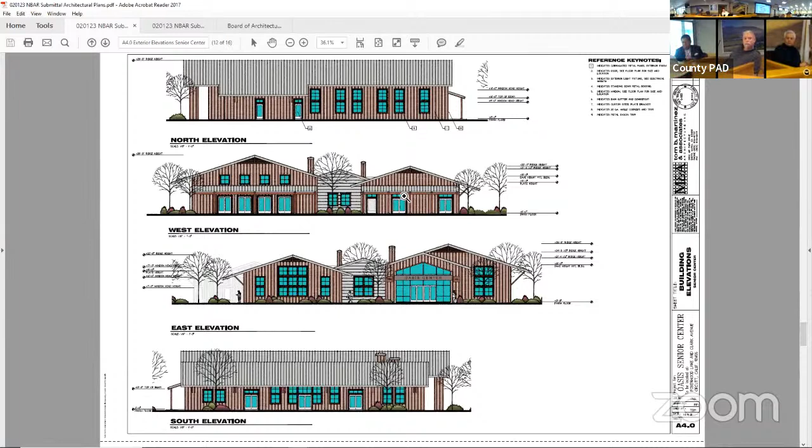I remember looking at it earlier. Can we go back to the floor plan real quick? It was something small, but there was a jump. I think he's asking what the depth of the well is. No, not the well, oh there it is right there. Yeah, it's approximately 1.5 feet then. You're correct, is that right? There is the dimension, you can go up to the dimension plan. Oh there it is, 20 inches. So it's not significant, because I think we originally had it on that front face and we just changed the direction to give it that sense of recess. And I think that was one of the comments from the conceptual, that we brought it in. Thank you.

Hi, how are you? Good, how are you? You must be worn out from doing all this, this is a huge project.

Well, that was one of the reasons that we hired Lori, because as an architect, and I think those of you that are architects, we've been doing this for 40 years, so we knew how easy it was in the old days, and they just keep adding layers and layers. So that's why we hire professionals like Lori to handle the stuff that doesn't pertain to our buildings. Just as a little background from myself, I was on the board of directors of a senior center in Los Alamos for a number of years, and paid visits to many senior centers, and I think I may have met you at that time.

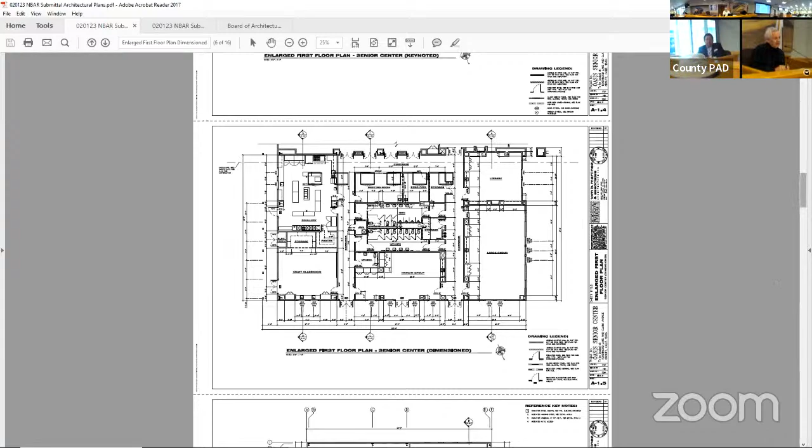One of the things I've noticed, certainly with the senior center in Los Alamos, was the singular lack of outdoor space, public gathering space to use outdoors. Even though we had doors, even though we had a front porch, it was not articulated in a way that encouraged people to go outside, particularly where this building is located, some of the most ideal weather in the state of California. And the seniors, we like to be outside, particularly in this area. I'm not seeing any outdoor access, outdoor covered area for gathering, something of that nature, which would encourage people to actually go outside and enjoy this beautiful setting.

I'm thinking of things like pergola areas, like a summer house that might have an interesting area for picnic benches and that sort of thing. I'm thinking of what has become a huge phenomenon in the area recently, which is fire pits for people to spend some good afternoon or early evening time together outside.

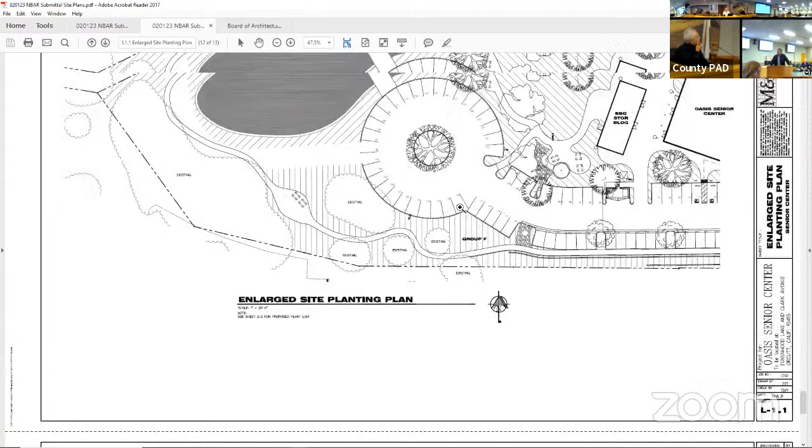The other thing I was looking at in the interior of the great room - can we address that outdoor area first? Sure, if we can go back a couple of slides, there is a group area.

We have some outdoor seating areas here, and we have this group D area where we could do some umbrellas, some seating areas for those outdoor leisure times. Absolutely, thinking of shaded areas rather than being in direct sun - as we lose our hair, we don't want to be outside in direct sun.

Also, just around the general center itself, I'm not noticing anything in the area of overhangs that would create outside, easy access outside seating, which seems to me a pretty easy solution to expand the usage to the outside. And then just moving to the indoors for a second, in the large meeting room.

If the expectation is that space will be rented for events, I think you might want to consider doing some sort of a modest stage. I think that would increase the use very significantly for musical elements, stage performances. Seniors like to perform, and I would think that would be a wonderful element to add to this facility without any great expense. It could even be a movable stage.

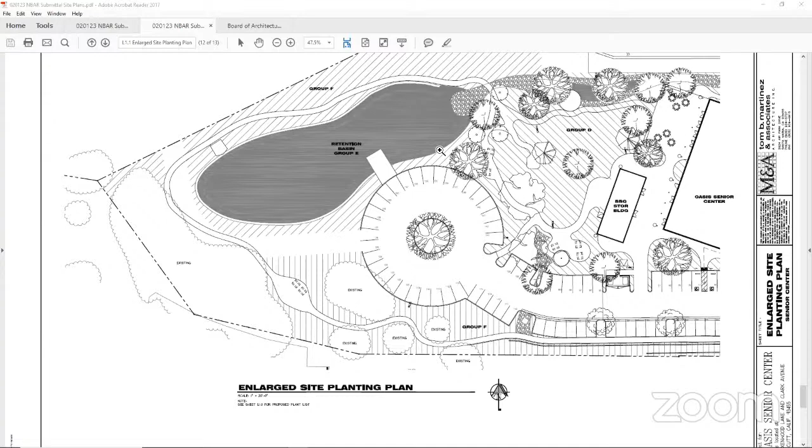Hi, yes, I really don't have any comments. I came on because I have great interest in this center, being an occupational—my name is Lisa Akins. I live in South Point Estates, a couple hundred feet from the Oasis Center, and I have a great interest in this moving forward. Being a retired occupational therapist, I do a lot of recreational stuff with the elders in the community. I have great interest in this. I have no comments, I really like what I've heard so far. I'm just here to hear what's happening. Okay, thank you.